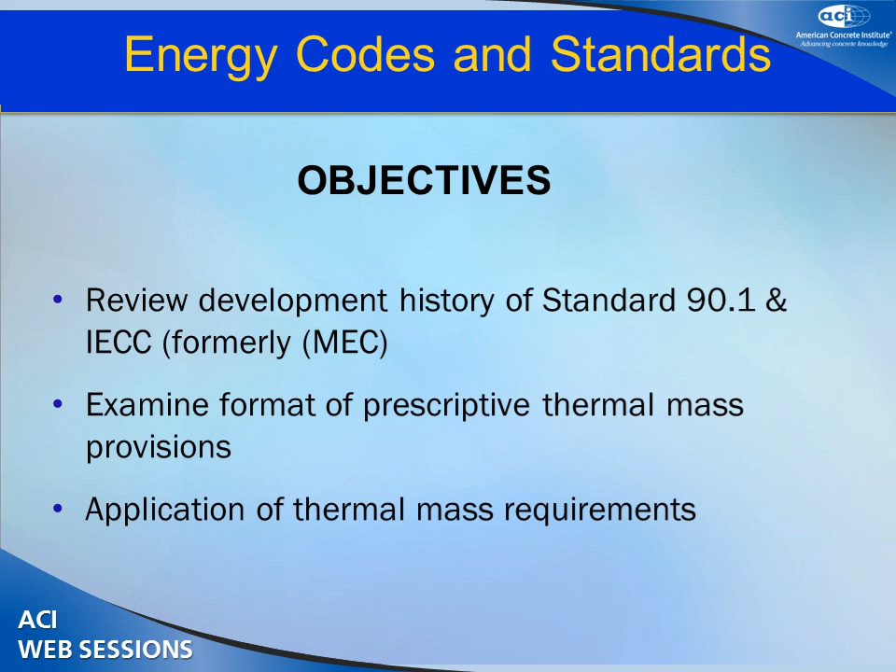Sometimes that does create some difficulties, especially for architects when they perhaps want to give consideration to using thermal mass provisions, and trying to understand how can they make use of that, short of going through the process of doing sophisticated modeling, which in today's time is becoming more important, and you'll see with our presenters that will be following me after I present mine. And then finally, the last thing is I'm going to show the entries into some of the tables and let you see the impact that thermal mass actually shows up.

So let me start with this timeline that I've placed up here, rather simple in nature. It shows 1975, and I'll ask the audience real quick, what was happening in the early 70s in our country that made energy conservation such an important issue? Oil embargo, sure enough.

As part of becoming energy conscious about our buildings, there was interest in coming up with something designers could use. One organization approached was the American Society of Heating, Refrigerating, and Air Conditioning Engineers (ASHRAE), to see if they could put together information. There were early efforts by the federal government to look at standards, but it became clear it should go through a public consensus process, and ASHRAE became the organization chosen to do that.

I want to tell you something of interest. Flying here yesterday from Georgia, I was reading in my newspaper a bit of history. Believe it or not, yesterday was the anniversary of 1974, the day most OPEC nations voted to try to remove or lift some of the embargo provisions they had placed on the United States. It's interesting that this happened around the same time as our presentations today.

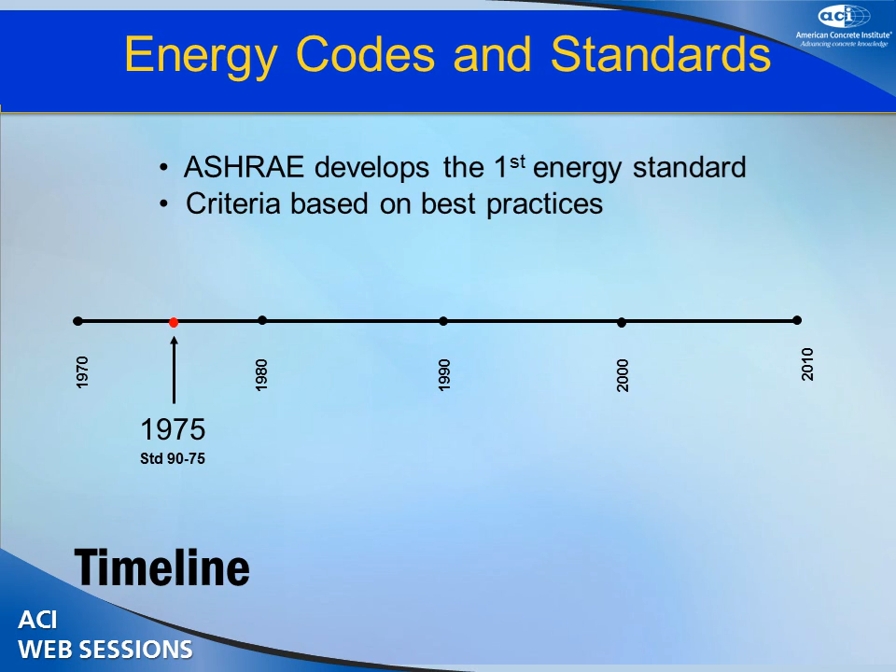So 1975 became important. In developing this standard, ASHRAE basically had to develop it based on best practices. It would not surprise me if much of those best practices were the same things shown in the previous presentation. They reflected what the industry knew at the time, what we knew how to do, and tried to put it into something usable in the marketplace—the standard—so there would be some standardization of what we do.

The other important thing about 1975 is the realization that we can come up with a standard and have designers consider using it, but unless it can be applied and in some cases enforced—meaning adoptable—the standard might not take us anywhere. So an effort was put together by model code groups to form an organization called the Council of American Building Officials, which is what CABO stands for.

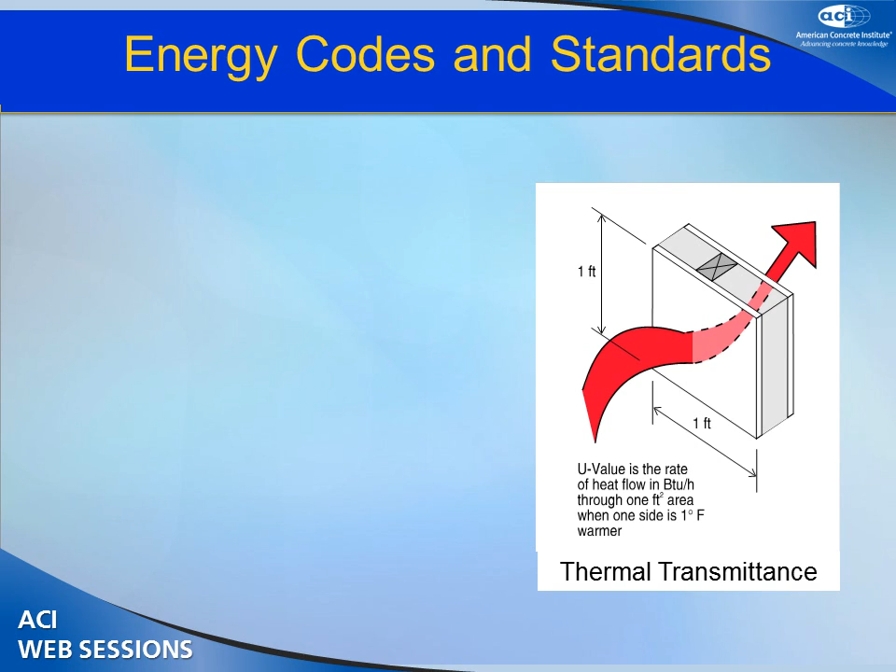They produced the first model energy code in 1977, basically the provisions from ASHRAE Standard 90-75. One of the things they did for the building envelope, the primary area of concern for prescriptive thermal provisions, was look at thermal transmittance through the walls. They came up with standard criteria for what your thermal transmittance should be for roofs, walls, floors, windows, and skylights, defining what kind of thermal transmittance we would allow through the building envelope.

One thing to always keep in mind when we talk about U values, or thermal transmittance, is that the smaller the value, the better it is from an energy conservation point of view.

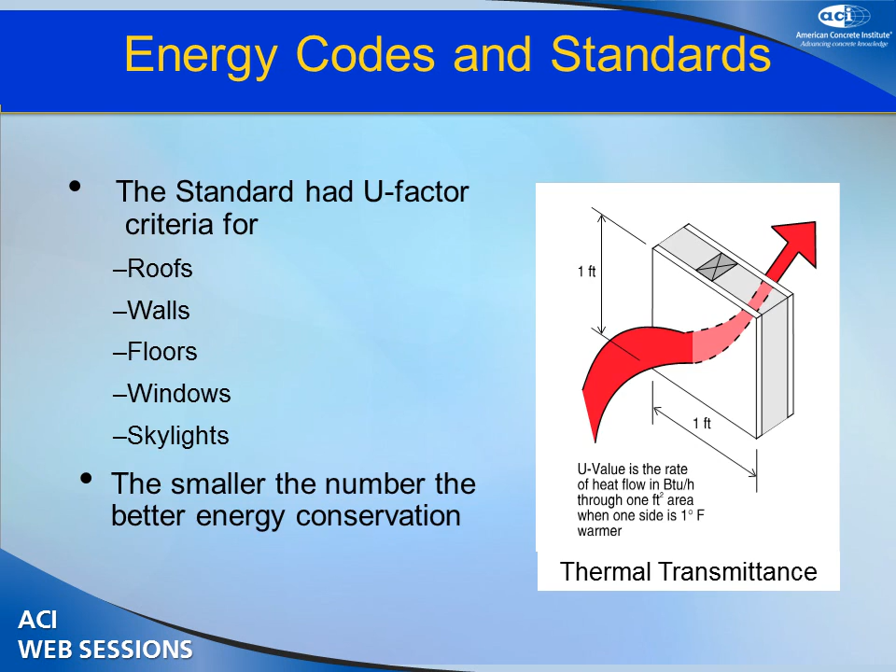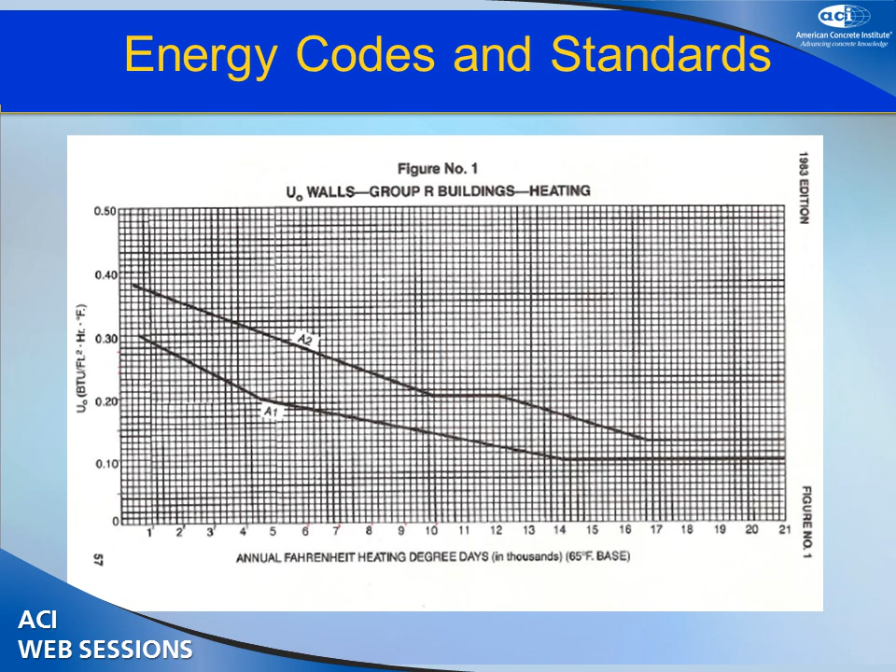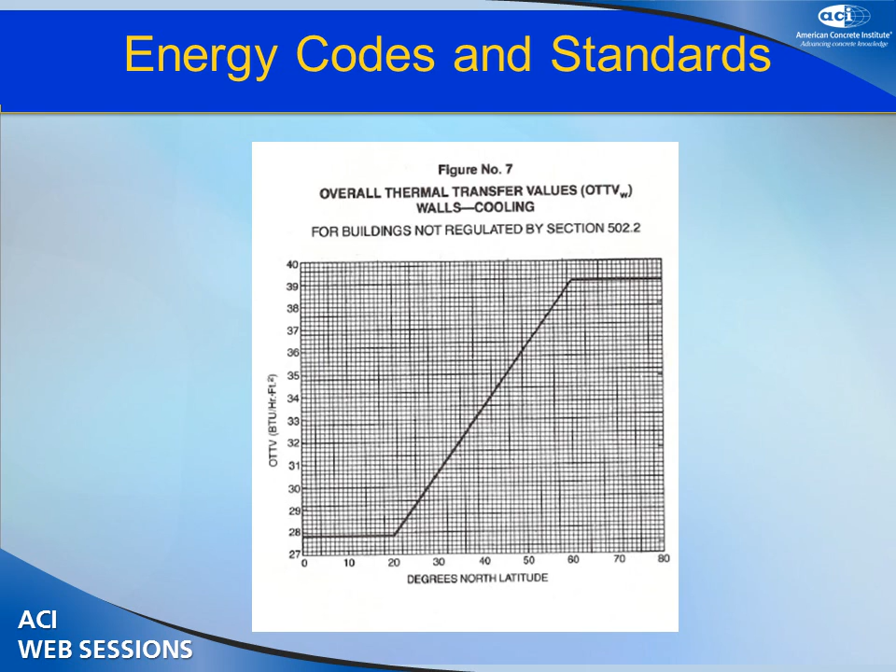This is what the chart for commercial buildings looked like—very similar in structure, but here you're coming up with what's referred to as an overall thermal transfer value. I'm showing just the graph for walls; they also had graphs for slabs and for roofs. Regardless, they made a distinction between commercial buildings and residential buildings.

The timeline then continues in 1980, when ASHRAE took a step further and separated their documents for commercial and residential into two separate documents. That's why, as you heard in the introduction of my background, ASHRAE Standard 90.2 is for low-rise residential, and ASHRAE Standard 90.1 covers all buildings except low-rise residential.

And that's where they started to make a distinction in those two categories of buildings. The Model Energy Code continued to develop along that time by incorporating many of the things happening within the ASHRAE consensus process, and many times it was putting it into a codified form that city, state, and county jurisdictions could adopt and enforce.

Another very important point, though, was that up to that point everything was stated in U values, and it was really hard to incorporate taking advantage of thermal mass provisions. But the mass industry, which included the concrete industry, the masonry industry, and the wood industry through heavy timber, which is a mass material, got together and through a process of research and modeling based on the available techniques at that time, started coming up with values to show how we could accommodate the use of mass in the provisions.

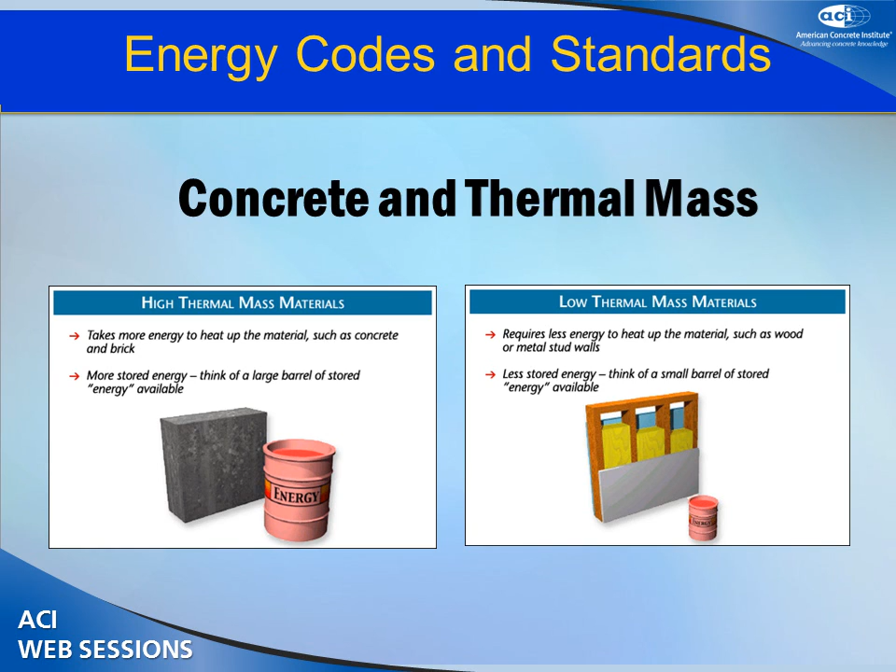When the mass industries came together at that time, they submitted code changes to the Model Energy Code, and those code changes through the code change process got incorporated in the 1988 addendum to the Model Energy Code. What we're talking about is simply the fact that you can take energy, heat up your heavy mass materials, and it stores more energy, or you can take a lightweight envelope and it takes a lot less energy to heat the building, but you don't get as much energy stored within the structure itself.

So that table allowed us the ability to recognize thermal mass, but it's still not as user-friendly at the time since we're having to deal with U factors. And the next thing that happened that was very major—let me back up and mention that particular application initially submitted was only for residential construction. It only applied for low-rise residential, 1- and 2-family dwellings.

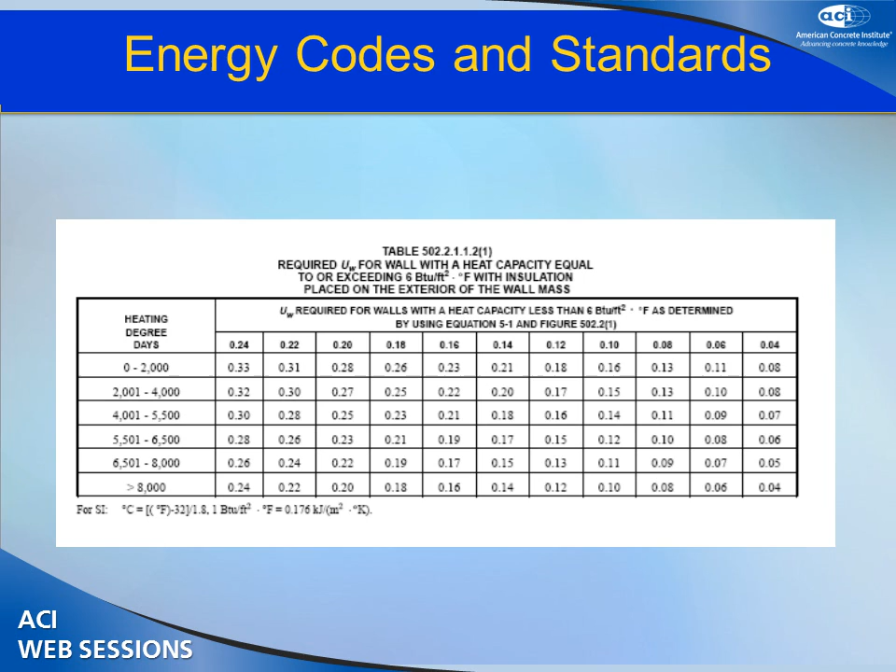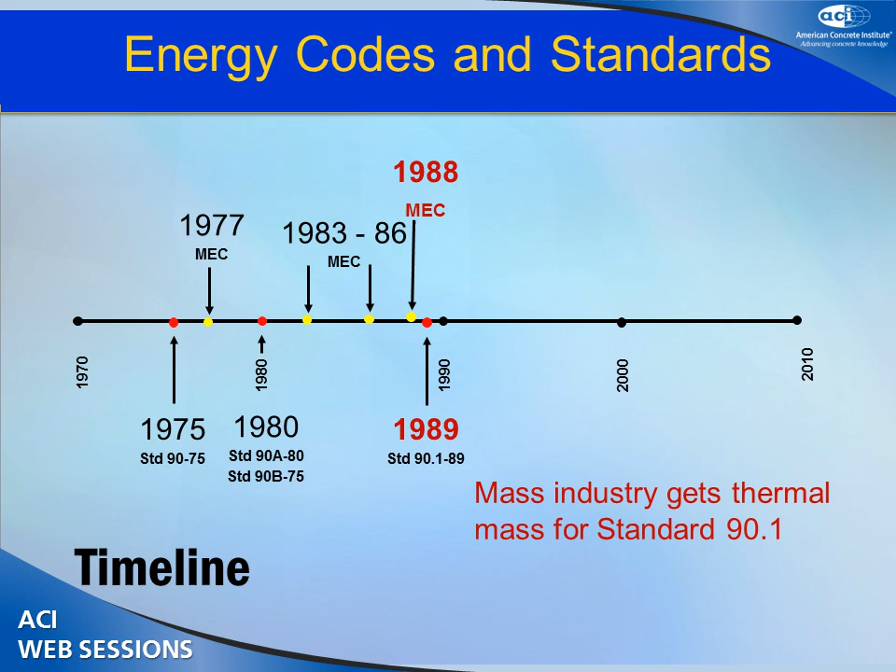So the next major thing that happened is through the work of the mass industries to get things incorporated into ASHRAE Standard 90.1, that being the standard for commercial buildings at that time. And what they ended up doing was introducing tables that would recognize thermal mass as part of the requirements for wall construction depending on your location.

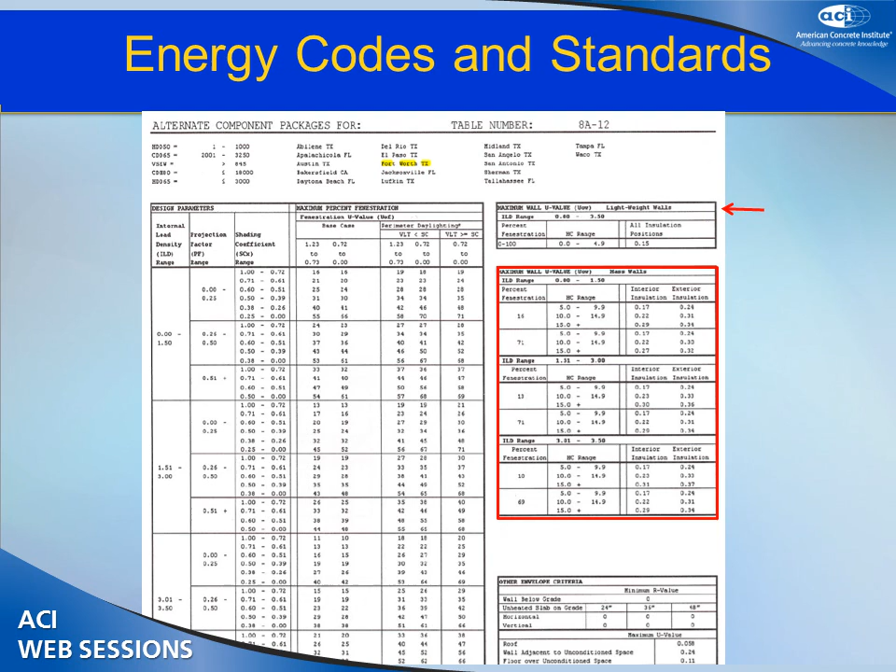Now there's a lot of complexity to the table, but I want to point out two things very quickly. You'll notice where my arrow points, that is the box that would tell you what you have to do for lightweight walls. The next box is the box that would tell you what you have to do for mass walls. It might look a little more complex, and it was in many regards, because it did acknowledge the fact that you got benefits for thermal mass, but you had to go through a few more hoops to apply it.

It included the fact that you had to look at how much your internal load was going to be from the design point of view, whether from people and furniture or lighting. You had three different categories of internal load range that you would look at, and depending on what the designer chose, that's how you would start to determine the envelope provisions. You'd look at fenestration, meaning windows and skylights—how much fenestration is being used would have an impact on the range of the mass wall. You would look at the heat capacity of the wall, with three different ranges you could apply in terms of each of those fenestration choices.

And then from that, you would also decide, well, would I have insulation on the interior of the building or the exterior of the building? Because that made a difference in what the value would be.

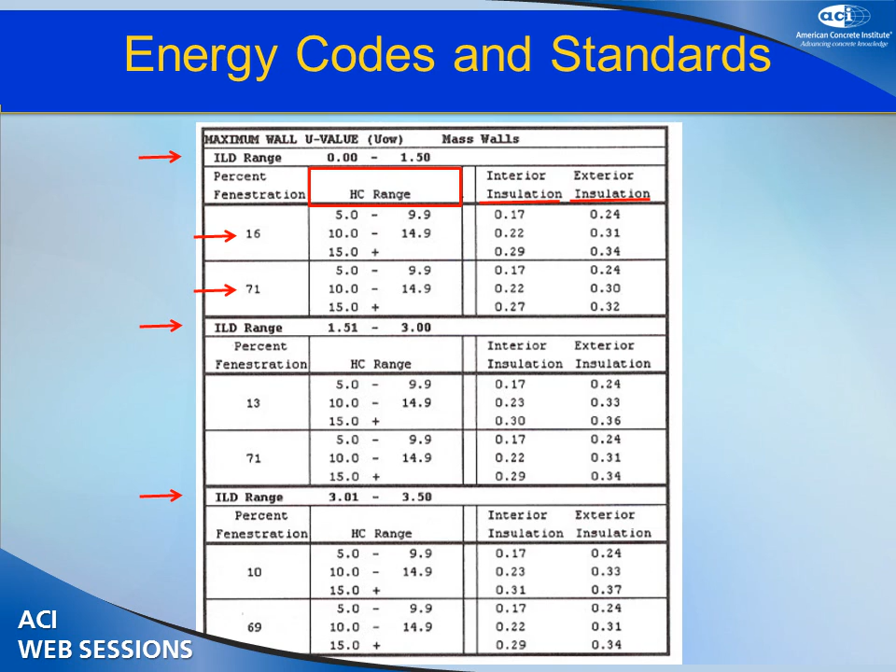The important thing is, though, thermal mass was being recognized in the commercial code and readily available. A little cumbersome to use, but still it was there, and it was based on much of the modeling that was used to first introduce it.

As we look at the timeline and continue, we'll find that there was very little change for prescriptive requirements in the Model Energy Code or in ASHRAE Standard 90.1 until 1999, and at that time there were major revisions to the building envelope. The major revisions that took place was to simplify the table for applying it.

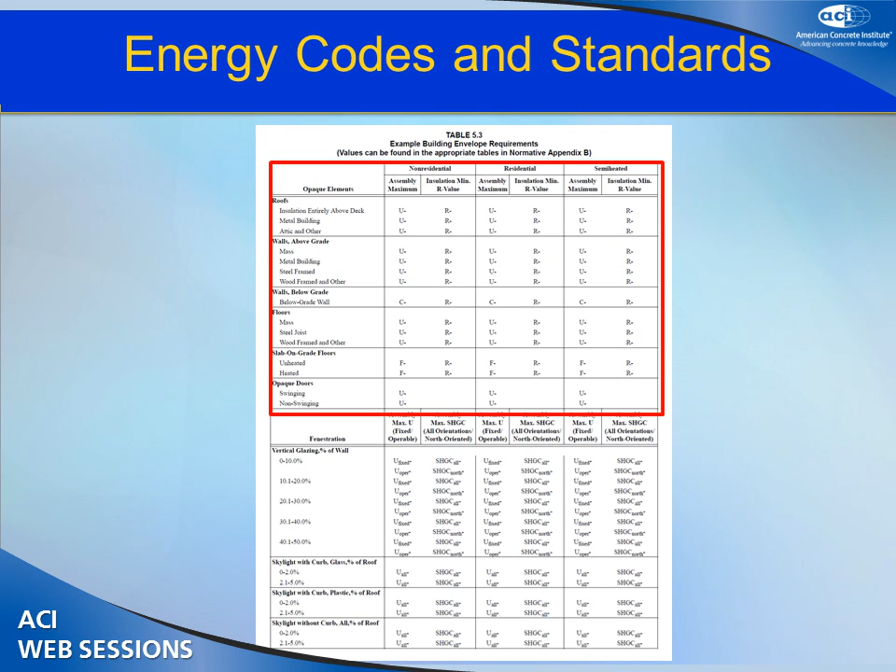The simplification - you can't see this table, but I'm going to concentrate on just this part. You will see that the two biggest simplifications were that it introduced that you told somebody what the assembly's U-factor had to be for a particular assembly, or you could simply apply an insulation value, that would be the effective insulation that you installed in the wall. And that made it much simpler for the designers.

The other significant thing that happened is we also started distinguishing between mass roofs, mass walls, walls below grade, mass floors - floors over unheated or outside temperatures - and of course there's also slabs on grade. But the important part was in doing that, it told how to simply apply mass provisions and apply R values to them and make it readily available just based on the climate zone.

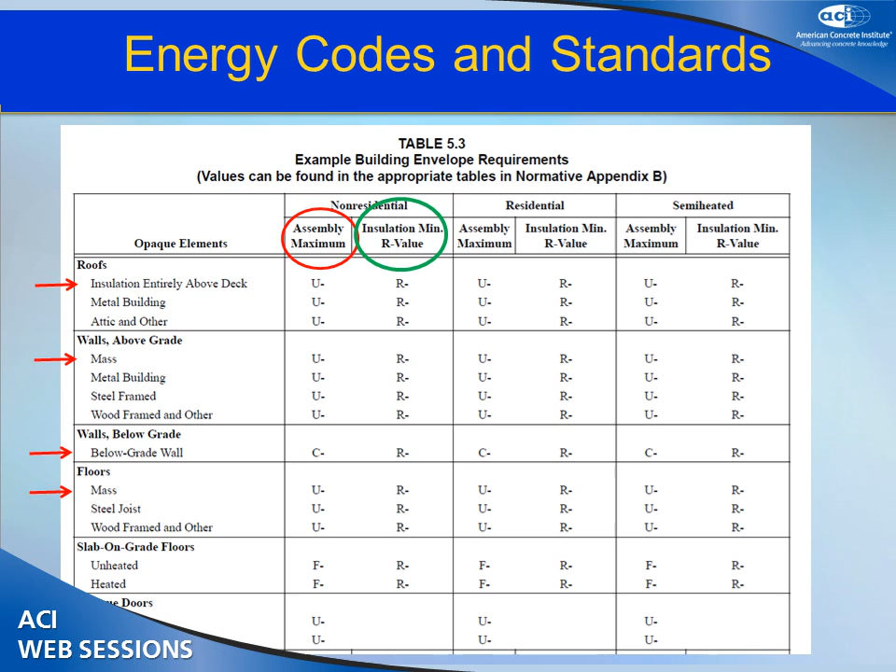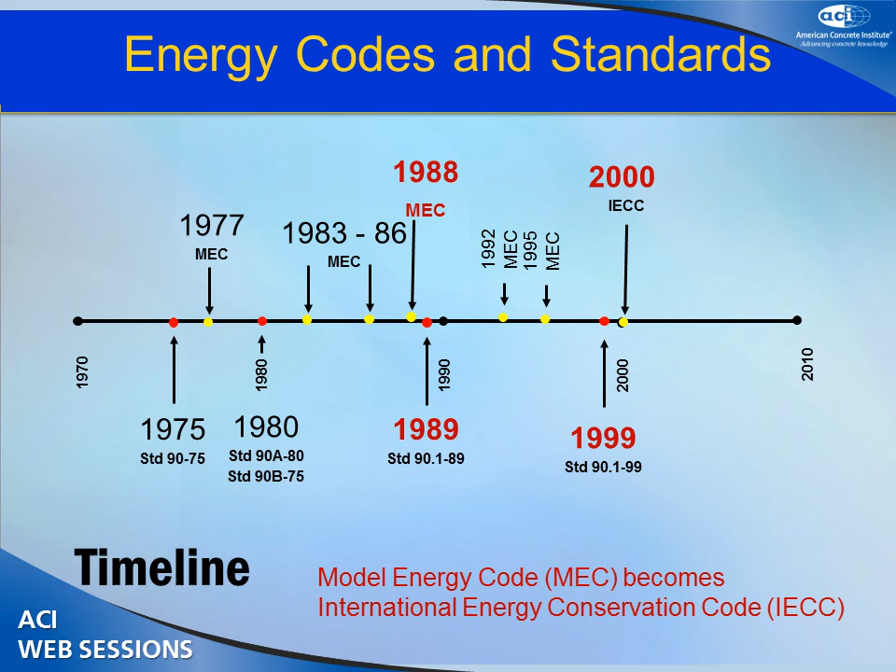I wanted to comment on the 2000 IECC. In 2000, the Model Energy Code transferred to become the International Energy Conservation Code and continued this continuity by incorporating the provisions that you see in the 1999 standard. They did that between 2000 and 2004.

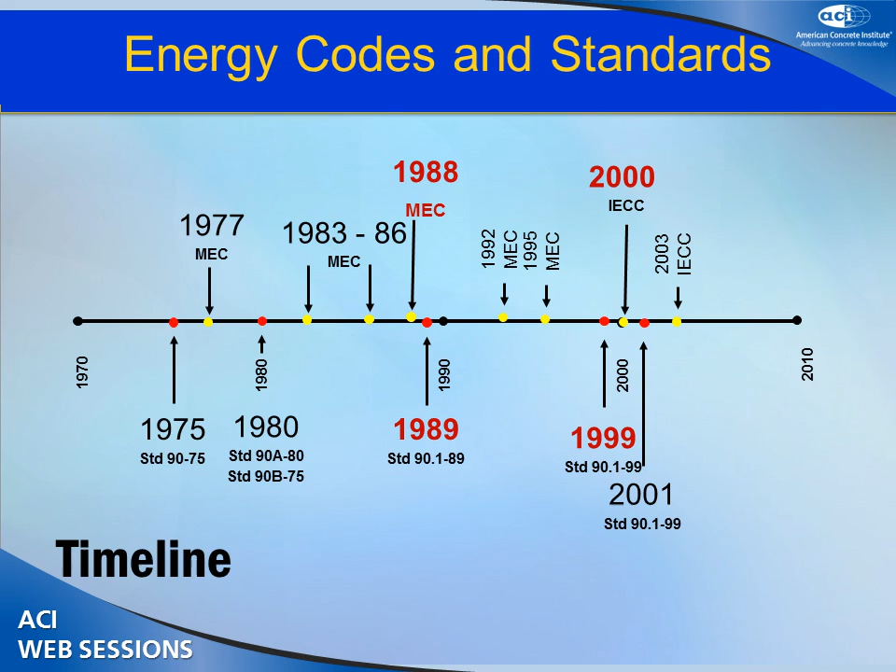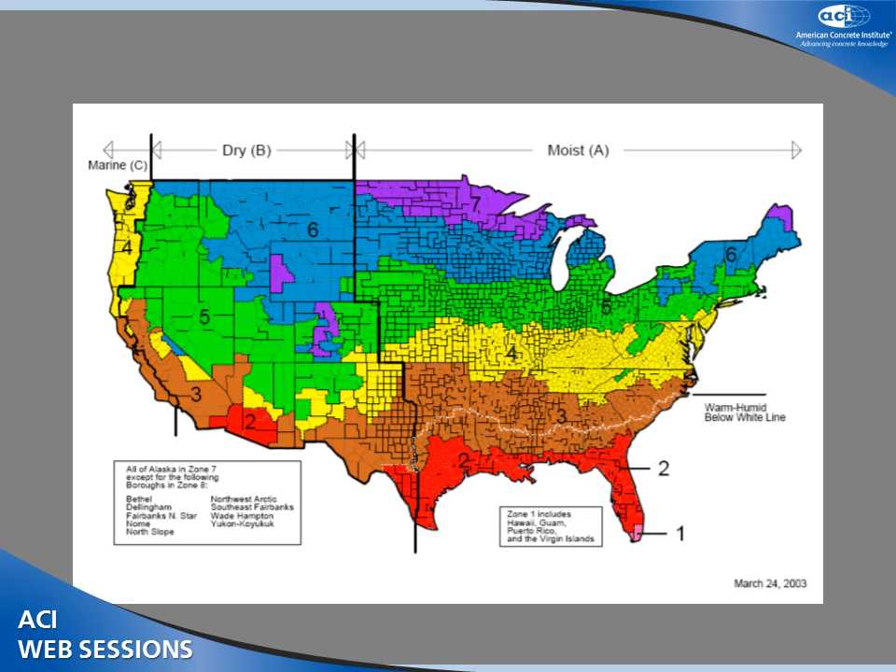In 2004, the other major change was we changed the climate maps, the climate data we used, from 26 different tables to 8 tables, and went to a simplified prescriptive map, which made it easier for the application of those provisions. I want to tell you that the 2004 IECC followed track with ASHRAE and incorporated the climate data.

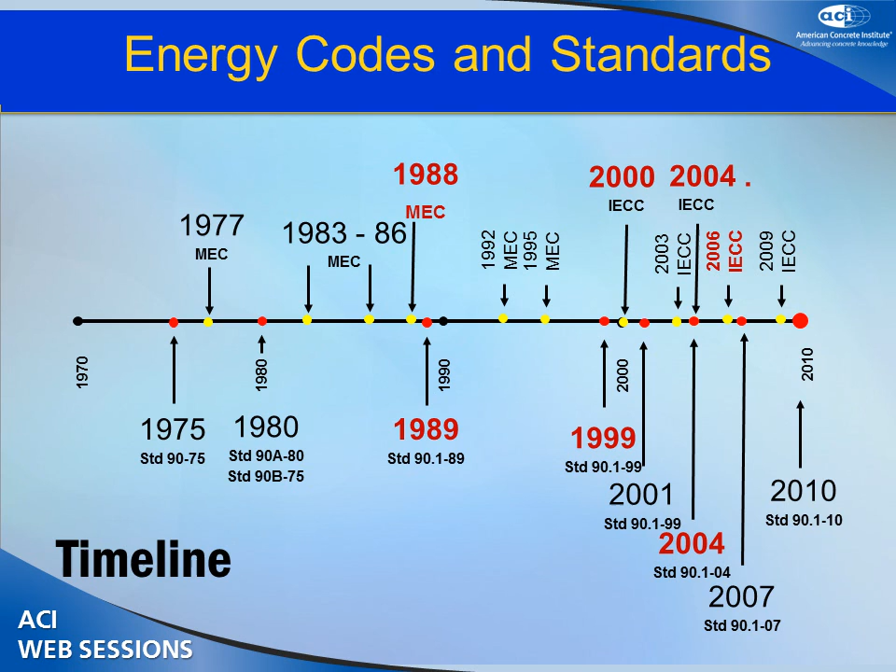And of course, when you look today, we're up to 2010. There is a 2013 edition of 90.1 that my committee now will be responsible for producing. But I want to just focus for a minute on 2010, which is also true through the 2009 IECC - it's based on the same document. It uses a similar table.

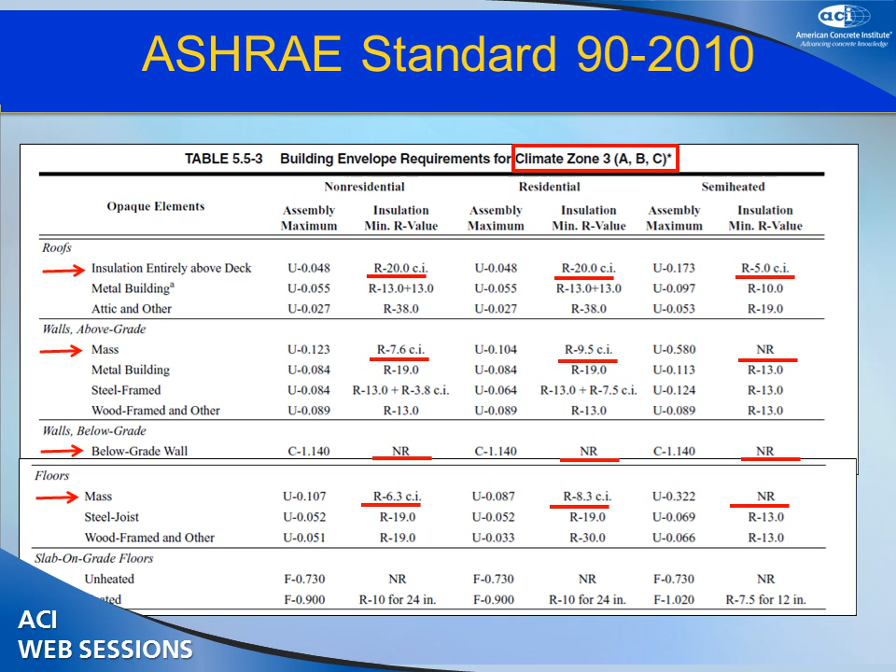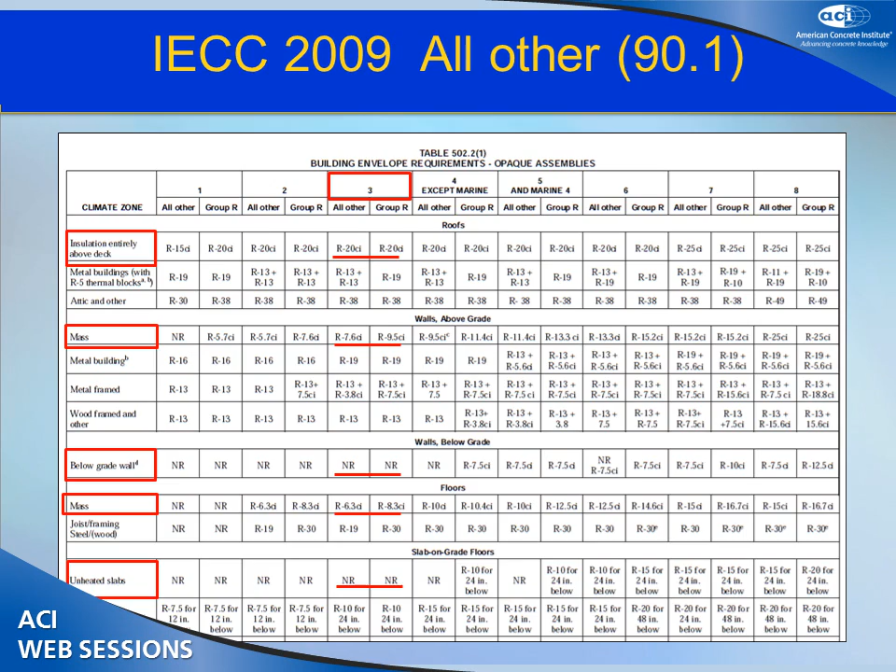And if you go to looking at the IECC, their table's a little bit different. There's climate zone 3, but you will see they have the same values that we apply when we do the 90.1 standard. And so I do want to comment that they put a separate table in there for low-rise residential, also following mass walls and basement walls and slabs - kept it simple.

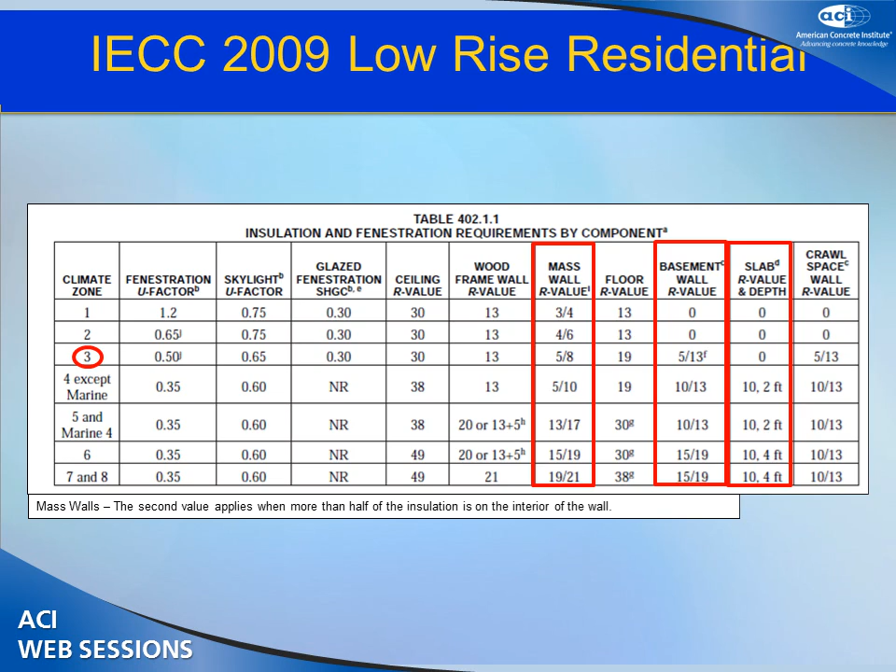My comment to you is that the simplified provisions are easy to use, but they really don't take advantage, I think, of thermal mass like we can if we go into the modeling aspects, which is what I think the next part of our seminar will be.